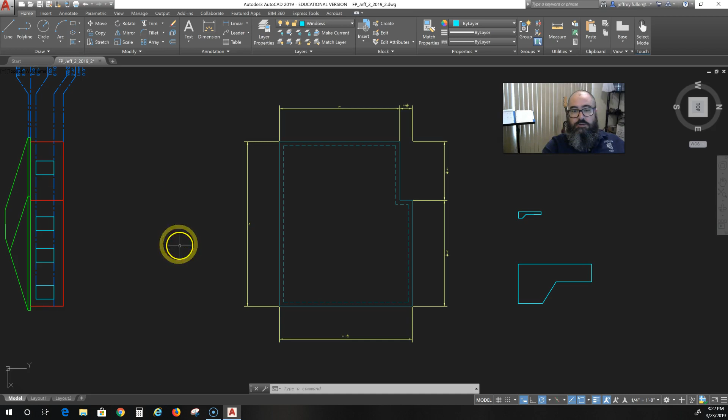Okay, first I want to show you what it is. This is your foundation plan. This outer line represents basically the perimeter, the same perimeter as your home, as your building.

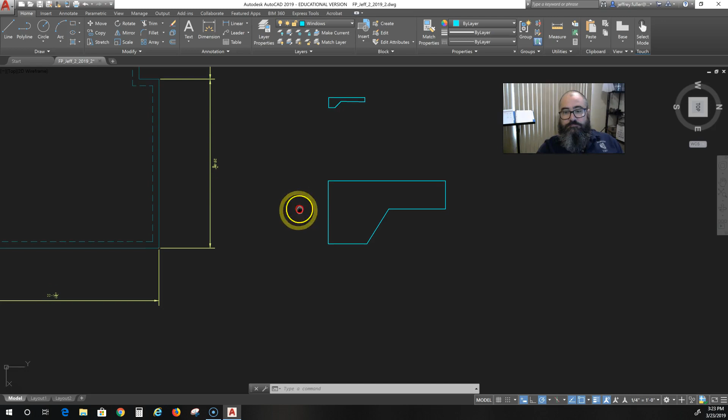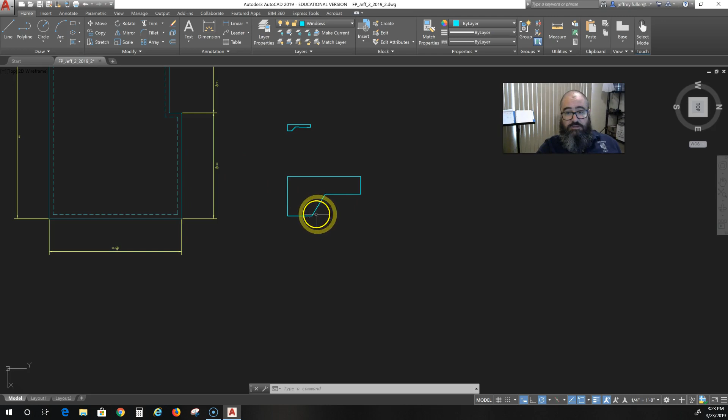And then this line represents the 12-inch thickened edge. To look at that in retrospect, I sketched a few drawings here. This dashed line is a hidden line, because you can't see it from above, but it is there. That line represents this section, this point right here. So from here to here is 12 inches. That's why we have this line there, but it's dashed because it's underneath the slab and you cannot see it normally. So we'll get rid of that.

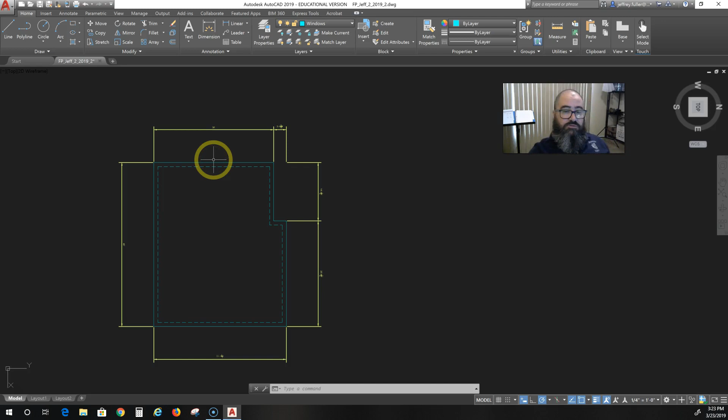Also notice that I created a new layer, a foundation layer, and put my foundation on that layer. I did not want to confuse it with any other exterior walls or anything like that. And again, my dimensions I put those on the same dimension layer that I've been using.

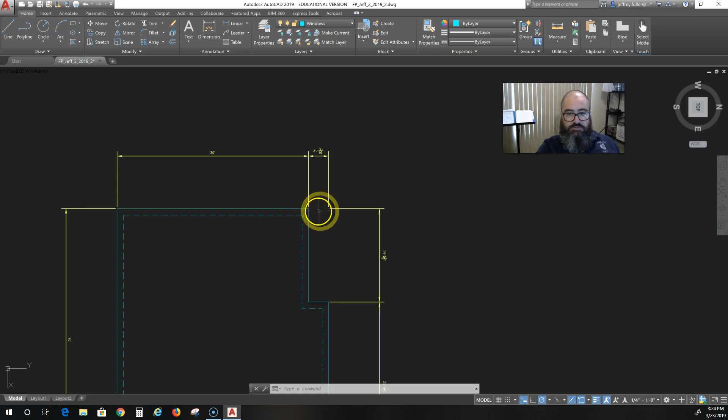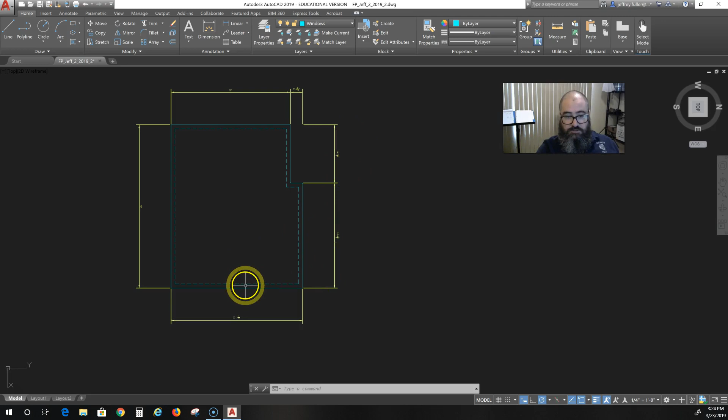The way the foundation is measured or dimensioned is basically you're measuring the breaks in the design itself. So from this corner to this corner is 30 feet, and from here to here is 3 feet 1 9/16 inches. We do the same thing all the way around, measuring if there are any feature breaks with a continuous dimension, and where there is not a break, we just measure the whole thing.

But that's the end product, that's what it's going to look like. Now, how did I get there? Real simple, it's not hard at all.

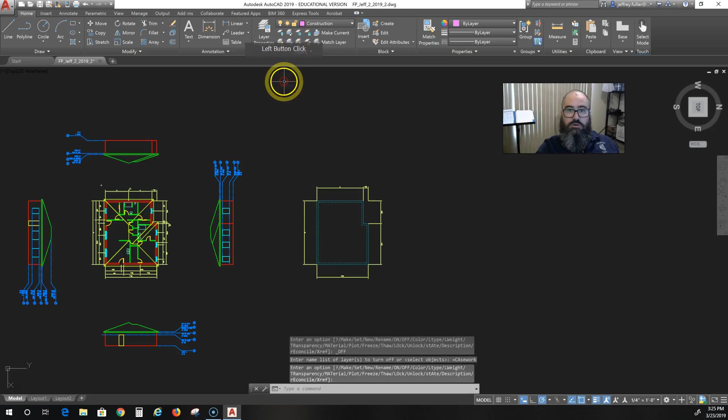What I did first is I turned off all layers except for my exterior walls. So now I have everything off except for my exterior walls, and I will do a crossing window, copy the footprint, click on the copy button, select a base point, move it over to the side.

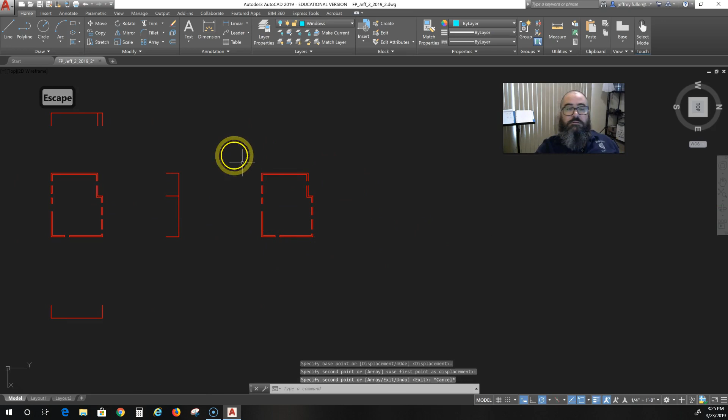Zoom into it, and you're going to do some deleting of the lines because you don't need the interior line here. Sometimes you can use it, if your wall thickness is the same thickness as your thickened edge, then yes. But my wall thickness is only a little over 10 inches, so I need a couple more inches to get that properly represented.

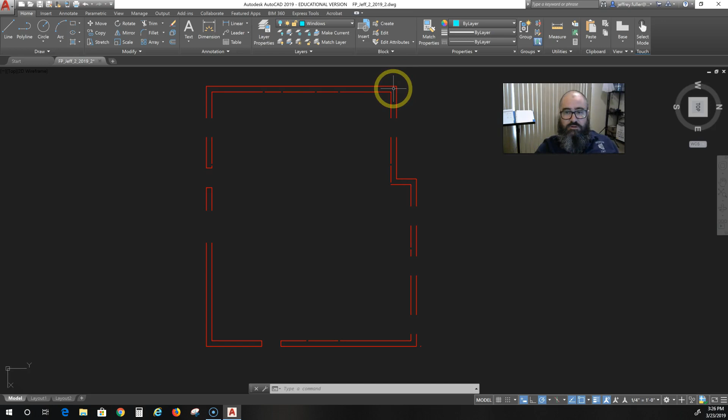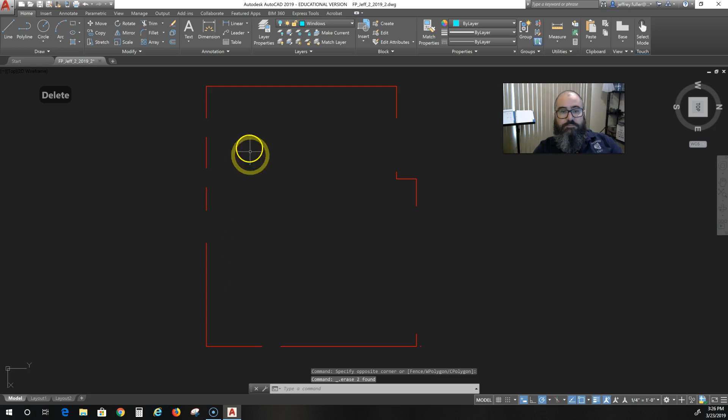So I'm going to delete all the interior lines by creating a crossing window and going around deleting that. The only thing I'm going to keep are my corners, so I need to keep some corners. I'm going to delete some of these other unnecessary lines, all those lines, and I think that'll do.

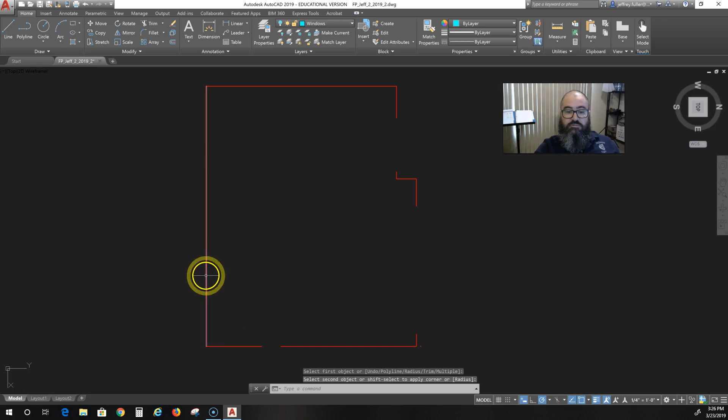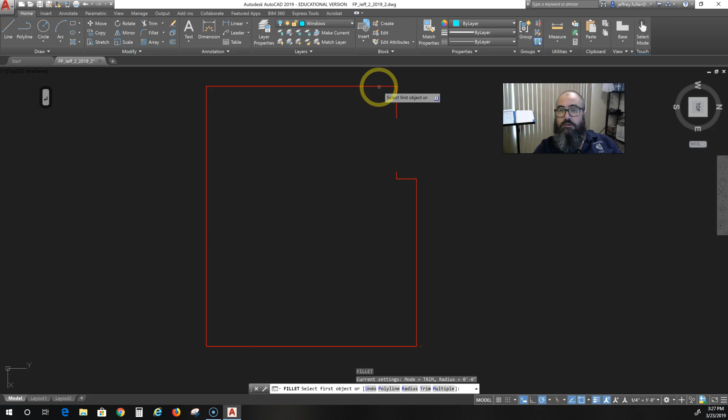Then I'm going to click on my fillet tool and close up those corners. So from here to here, and hit enter to restart that. Here to here, restart. We want to go from here to here, and then from here to there. Okay, now I have a complete outline of my building's footprint.

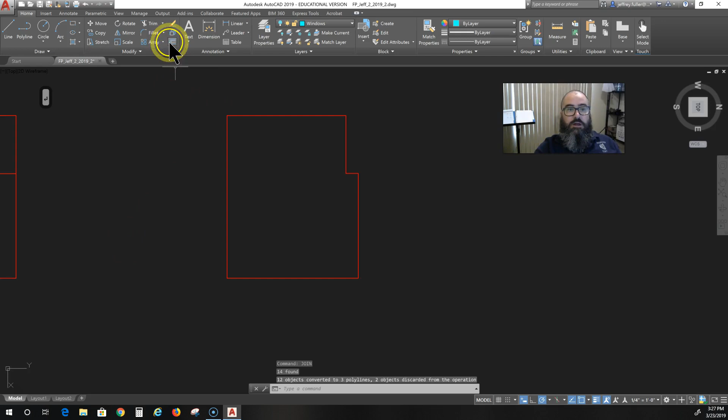I'm going to select all of that and click join, or type the word join in the dynamic input, to make all that one shape. Then I'm going to offset that. I'll click on the offset button and offset that 1 foot. My dynamic input already says 1 foot, so I will just click enter to accept that, and then set everything in like so.

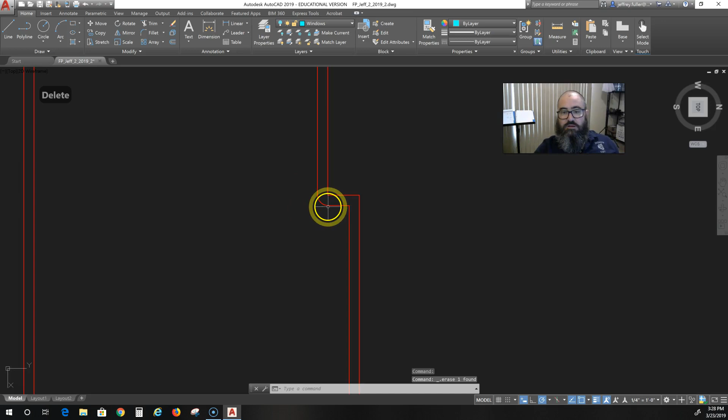Two problems, no big deal. I don't want that line, and this right here should not have that fillet on there. So I'm going to select the interior line, explode that and get rid of this fillet, and then create another corner right there.

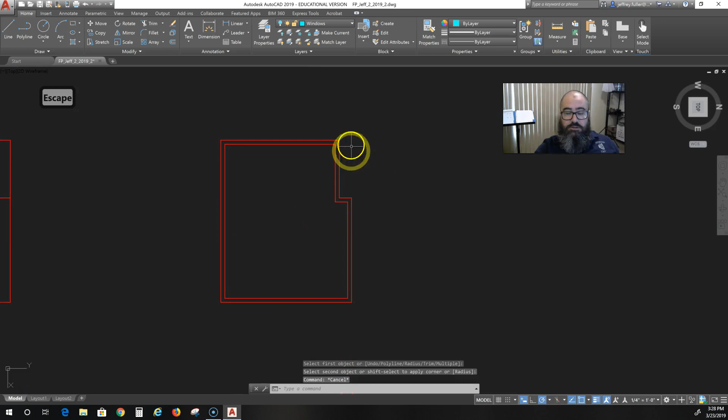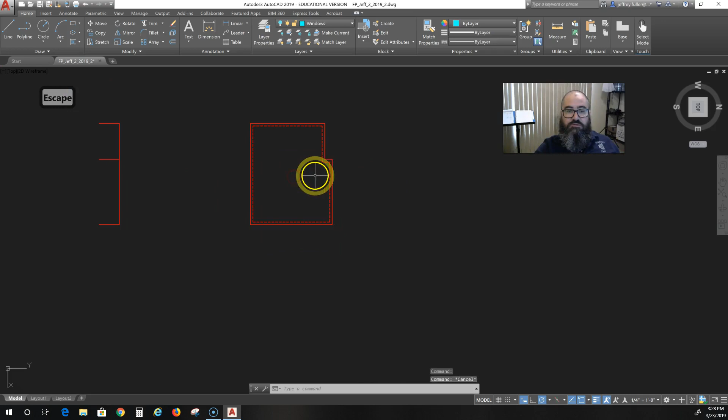Next thing I'm going to do is select the interior lines and that one, and come over here to my properties panel and change it to a hidden line. So now that is a hidden line that represents the thickened edge.

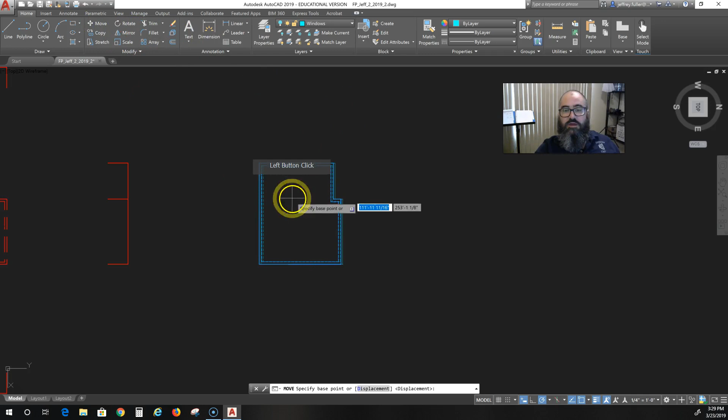And now I want to put all of it on my foundation layer, which right now is turned off. And let's do this, because I actually have a double copy there now. Alright, so there we go, we have our foundation layout.

You just need to go and dimension that. Dimension lines are 8 feet away from the edge of the slab, and they go all the way around, marking all of your breaks in your design. So that's it for the monolithic slab foundation. Good luck on that.